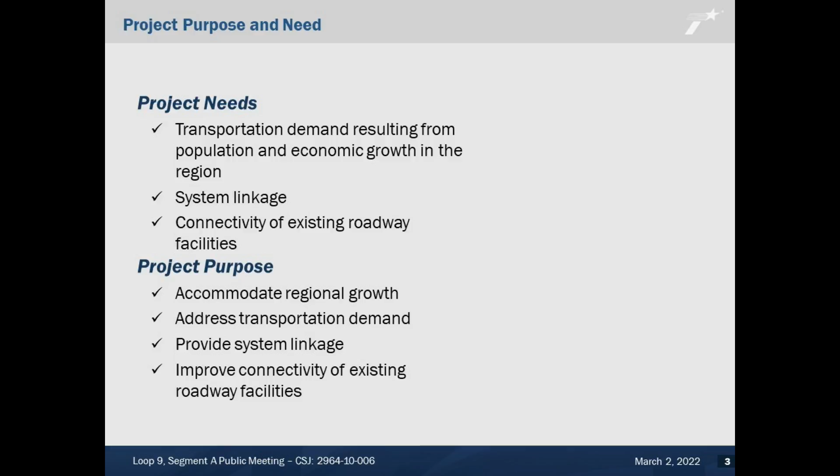The Loop 9 Segment A project is needed because the current roadway system does not adequately support the transportation demand, system linkages, and connectivity of existing roadways that is needed as a result of projected population growth. The purpose of the proposed Loop 9 project is to develop a facility that would help address transportation demand and system linkage within the study area by providing a direct link from IH 35 East to US 67 that would serve the residents and businesses in the area.

Loop 9 has been identified in transportation plans for a number of years. Changes in demographics, forecasted traffic growth, and potential to connect to other major facilities have driven the need to reevaluate the overall concept of Loop 9 throughout the years. In May of 2019, TxDOT Dallas District issued a Notice of Intent to prepare an Environmental Impact Statement, or EIS, for the proposed Loop 9 Segment A project.

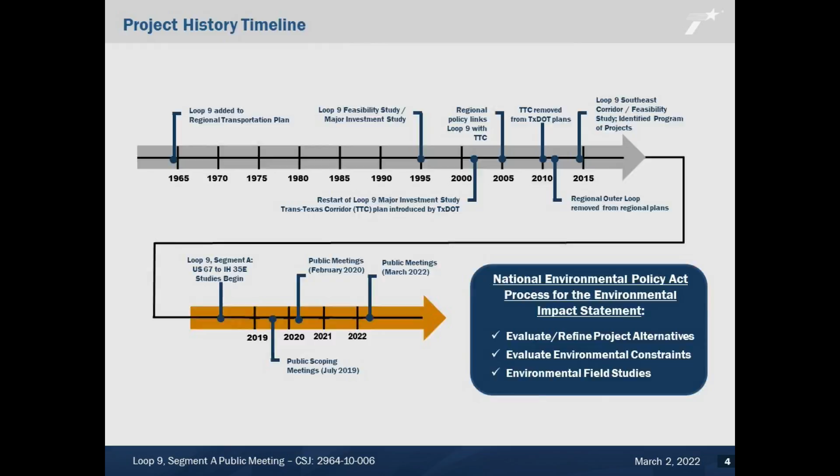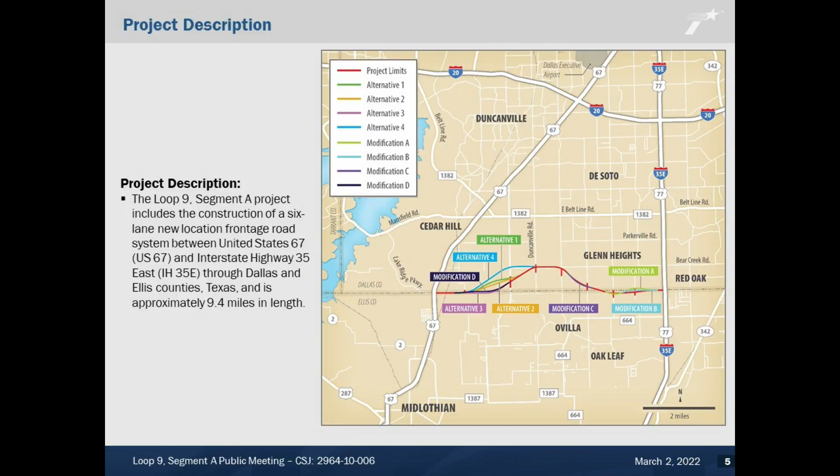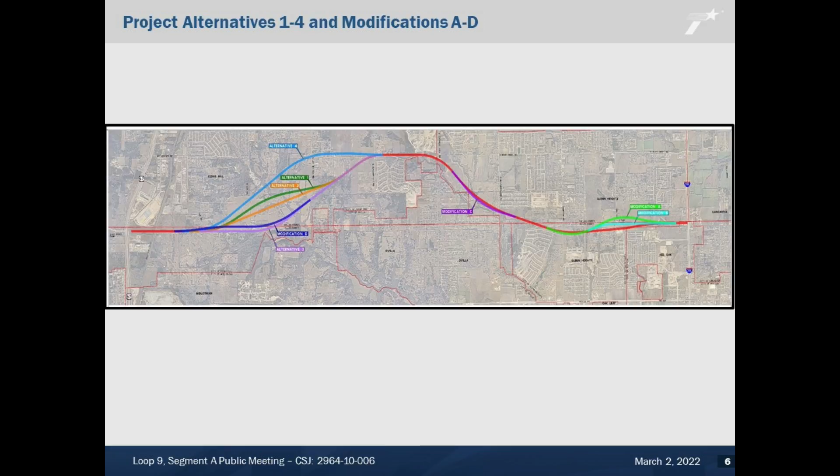The Loop 9 Segment A project includes the construction of a 6-lane new location frontage road system between US 67 and IH 35 East through Dallas and Ellis counties, Texas, and it is approximately 9.4 miles in length. A larger version of this location map is available online as a downloadable handout. TxDOT is considering four alternatives between Tar Road and east of South Joe Wilson Road, as shown on the screen. Please see the project website for more information on each alternative. Additionally, as a result of prior public and stakeholder comments, 4 modifications are also being evaluated and presented at this public meeting. This slide shows the 4 alternatives being considered between Tar Road and east of South Joe Wilson Road.

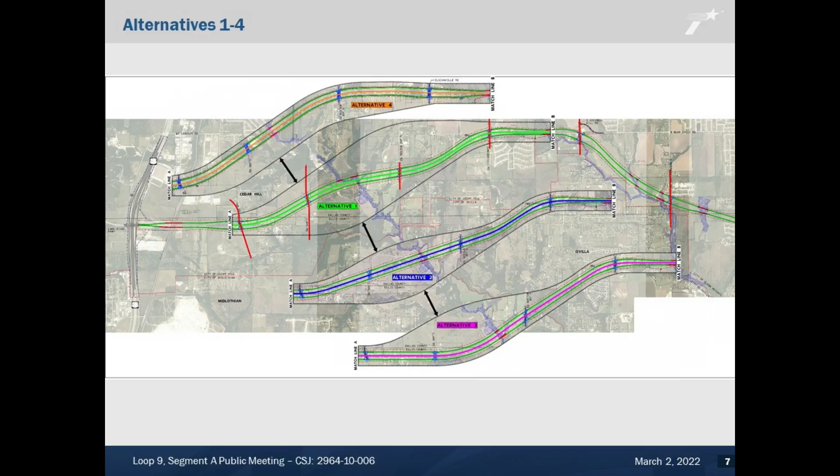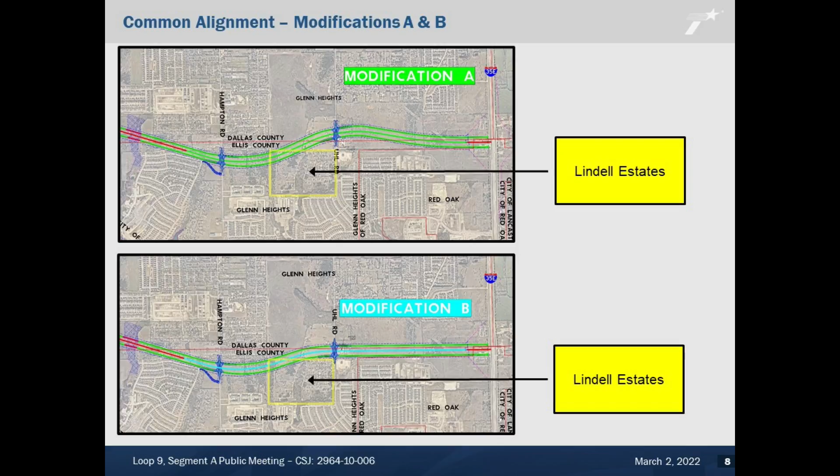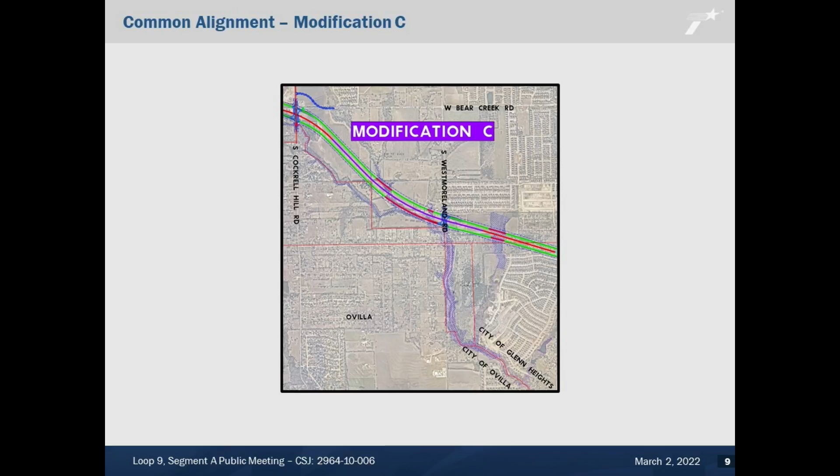Modifications A and B to the common alignment were developed to reduce potential residential impacts at Lindell Estates. From 2003 to 2017, no new homes have been built within the proposed right-of-way. However, since 2017, approximately 16 new homes have been constructed within the proposed right-of-way. Additionally, multiple homes and plots in other areas of Lindell Estates have been built out as a result of influences outside of TxDOT's control. Modification C was developed to optimize the intersection with South Westmoreland Road and reduce potential residential impacts to homes on Shady Meadows Lane. Modification D was developed along Alternative 3 to reduce potential residential and environmental impacts near Knight Road.

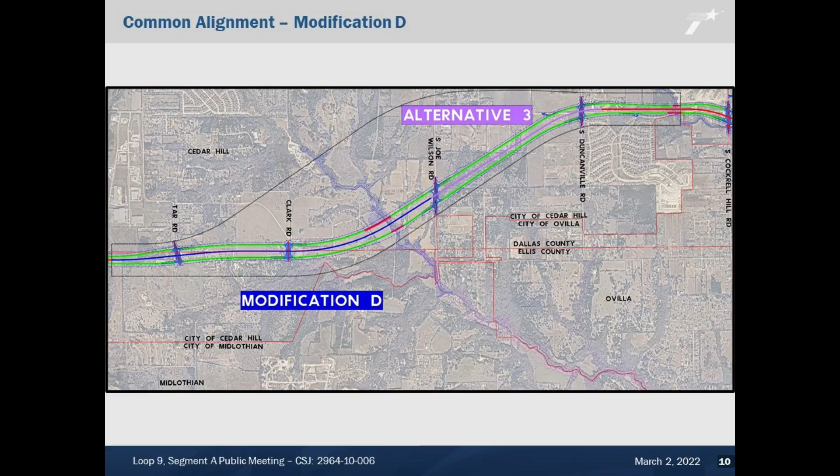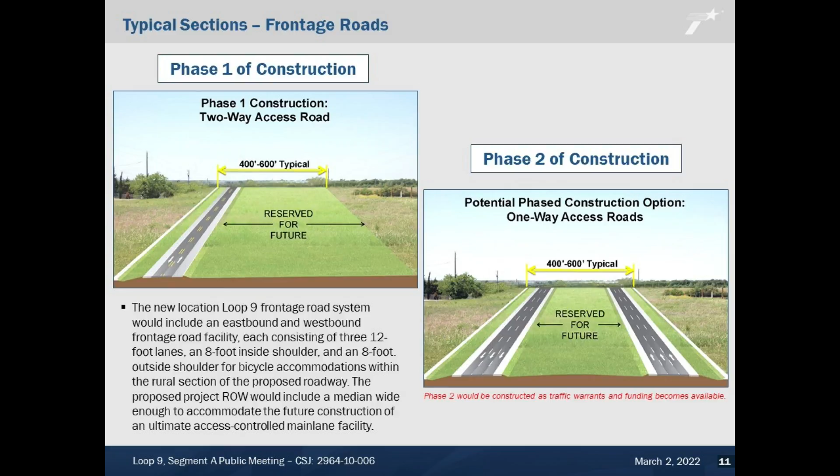The new location frontage road system would include an eastbound and westbound frontage road facility, each consisting of 3 12-foot lanes, an 8-foot inside shoulder, and an 8-foot outside shoulder for bicycle accommodations within the rural section of the proposed roadway. The proposed project right-of-way would include a median wide enough to accommodate the future construction of an ultimate access-controlled mainlane facility. The frontage roads would likely be constructed in 2 phases based on traffic needs and project funding. All right-of-way acquisition would be completed in accordance with the Uniform Relocation Assistance and Real Property Acquisition Policies Act of 1970 as amended. Please see the project website for more information on construction phasing.

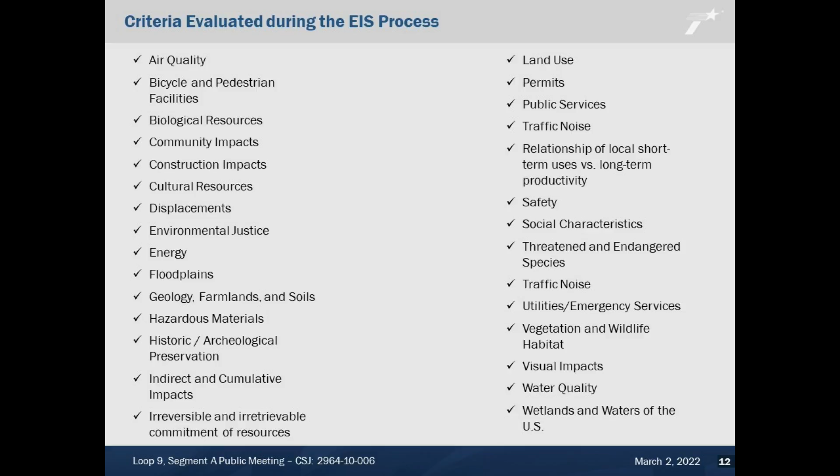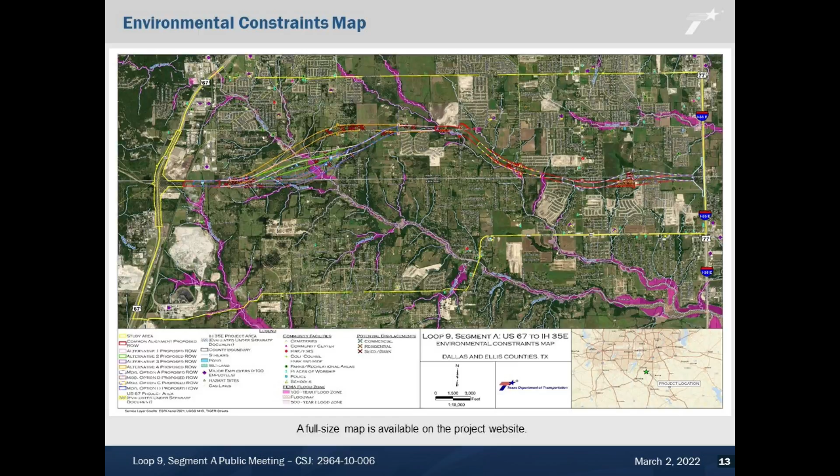Comments will be accepted in several ways. You may fill out an online comment form, submit a written comment via email to leong.ding@txdot.gov, or submit a written comment via U.S. mail to the TxDOT Dallas District Office, Attention: Leong Ding, PE, 4777 East U.S. Highway 80, Mesquite, Texas, 75150. Comments must be received or postmarked by Friday, March 18, 2022, to be included as part of the official public meeting record. Comments received by March 18th will be addressed in the documentation of public meeting report and posted to the project website. For more information, please contact Leong Ding, PE, TxDOT Project Manager at